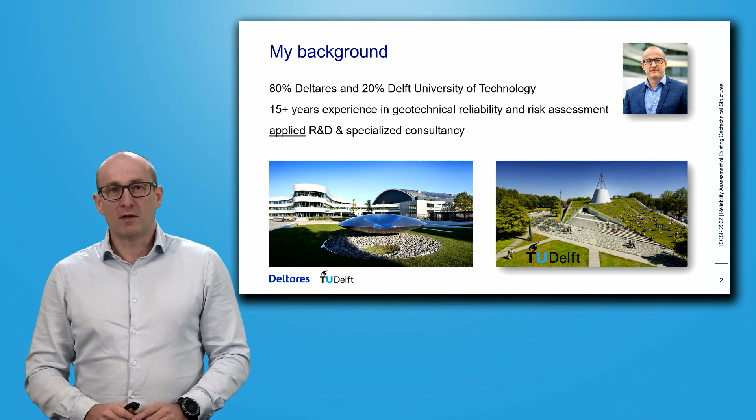I work at Deltares, a Dutch research institute in Delft, and part-time I am affiliated to Delft University of Technology. My field of work and expertise is geotechnical reliability and risk assessment, and I work mostly in applied research, development, and specialized consultancy. I've underlined the word applied because this is very much the angle of my talk. It's about application and how to bridge the gap between academia and practice.

I want to start with why I think our community has something to contribute to the assessment of existing geotechnical structures. I will give you some examples from practice and applied research and development, and I will go into development needs.

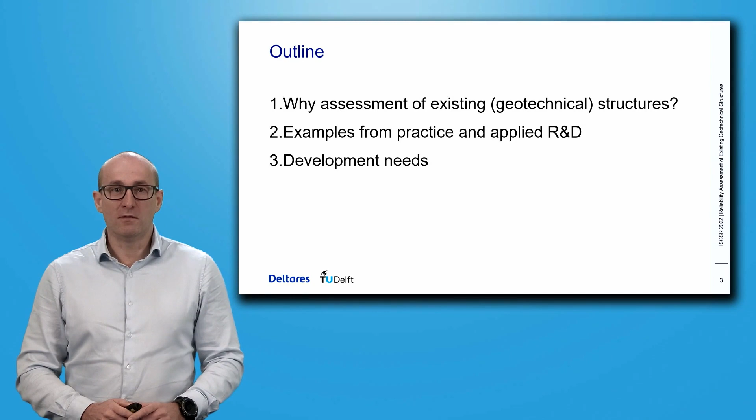Before looking into the assessment of existing structures, let's have a look at where design, reliability-based design, is applied to geotechnical structures in practice. I'm drawing here from my own experience. I'm sure some of you will have other experiences too.

In the Dutch context, reliability-based design is applied heavily in the field of flood defenses, like dikes and hydraulic structures, because our safety standards are formulated in terms of acceptable probabilities of flooding or failure.

You also see applications in offshore foundations, for example in the optimization of monopiles. But all these are rather special or extraordinary situations, and it makes sense, because if you go reliability-based and full probabilistic, it costs more effort compared to standard designs, of course.

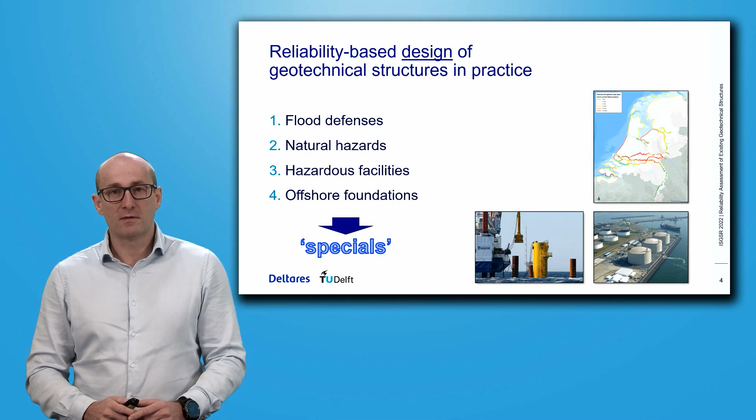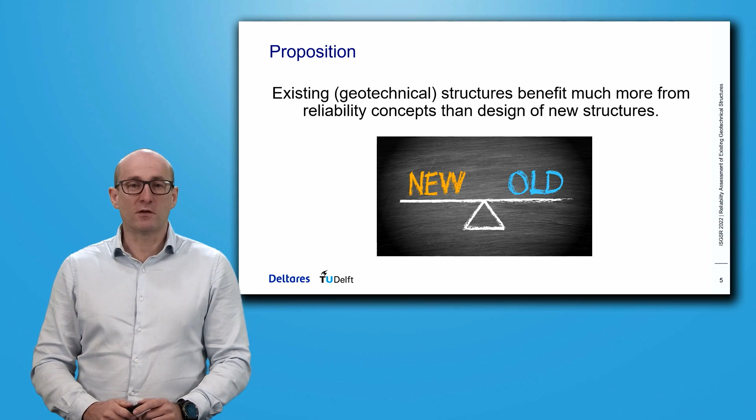But the proposition I want to bring forward today is that existing geotechnical structures benefit much more from reliability concepts than the design of new structures. And that's what I want to make the case for in this lecture.

Let's have a look at the Port of Rotterdam and their portfolio of hundreds of quay walls, existing structures. More than 50% of those quay walls are beyond or approaching their design lifetime of, most of the time, 50 years. So naturally, the asset management shifts focus from new construction to maintenance and lifetime extension of these structures.

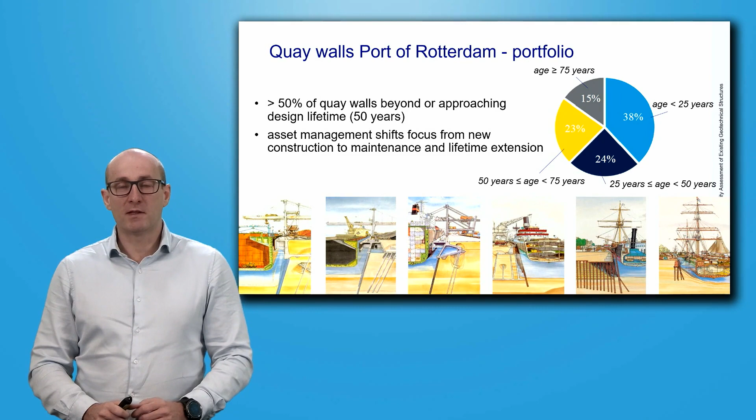Another example from Amsterdam: besides all sorts of other infrastructure assets that the city has, there is a large number of historic quay walls and historic bridges in the inner city center. You can see the numbers here - more than 200 kilometers of these old quay walls, more than 800 bridges, and these are masonry structures founded on wooden pile foundations, subject to bacterial degradation.

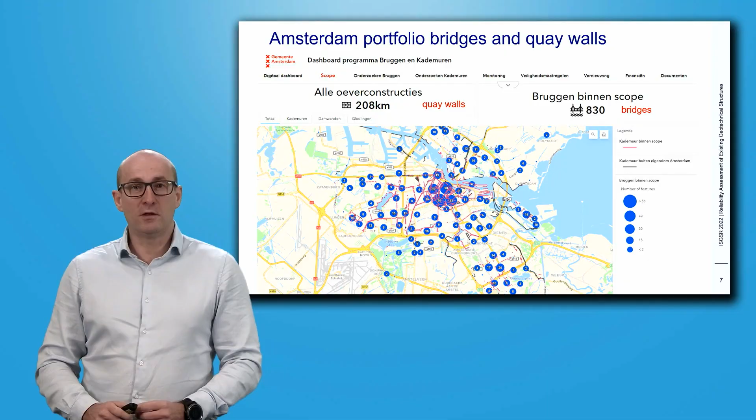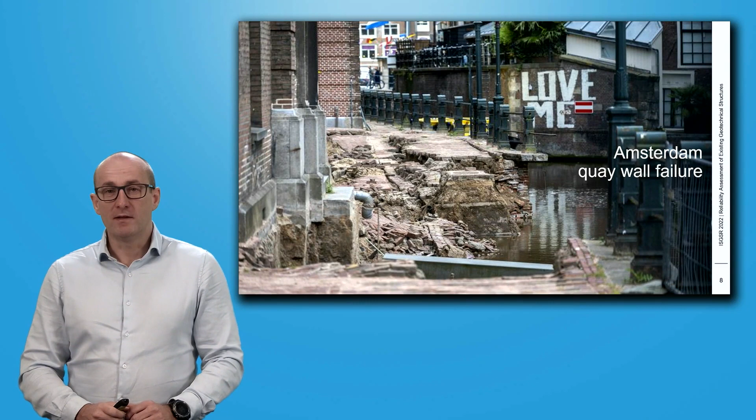And they need to be assessed for safety and safe continued use, because in Amsterdam we have seen failures like this one, a quay wall failure from last year. This was not a very big structure. Nevertheless, this example reminds us of the fact that the lifetime of these structures is not endless or unlimited.

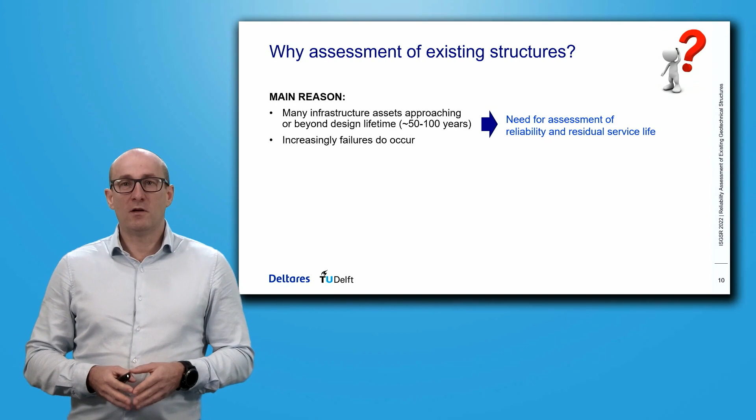So the main reason for looking at existing structures is that these structures get older and they approach their design lifetime, or they're already older than what they were originally designed for, and sometimes failures do occur. So there is clearly a need for assessment of the reliability of these structures and of their residual service life.

But there are other reasons to look at existing structures, and that is change of use of these structures. Going back to the Port of Rotterdam as an example, sometimes the owners of these quay wall structures have questions about whether larger ships can be moored at these quays.

Sometimes this is accompanied by questions of whether more nautical depth is possible here, which would mean dredging in front of the wall and increase of the retaining height. Other questions could be intensified use in terms of the surcharge loads on or next to the structure, or changes in safety requirements.

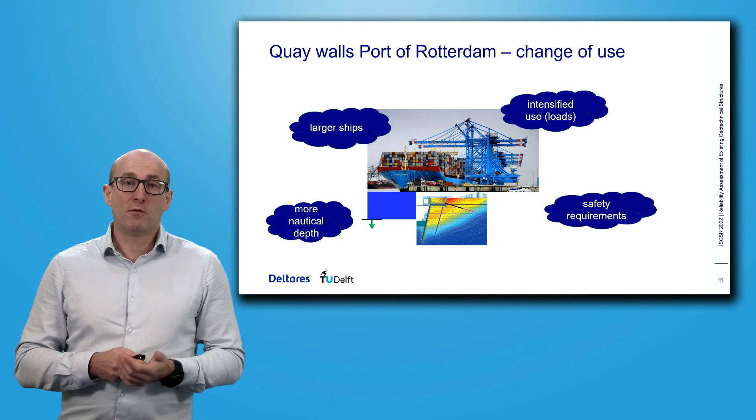Another example would be railway embankments. The Dutch infrastructure owner of the railway network, ProRail, frequently faces questions about the possibility of running higher train speeds, increasing service frequencies on some tracks and the underlying embankments, and also using heavier trains.

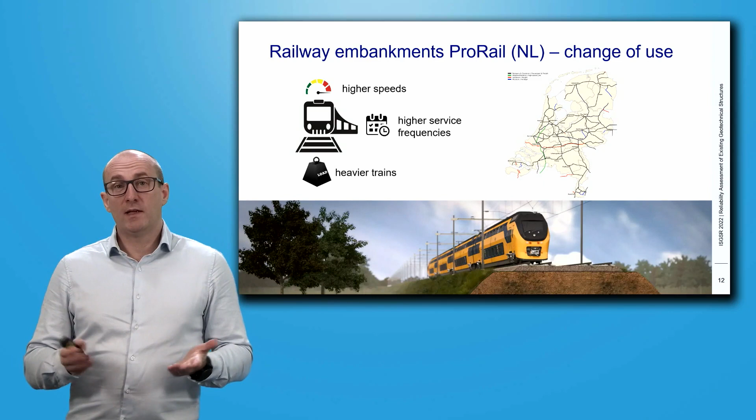So the question is, can that be done safely? This means that not just the age of these structures and going beyond the design lifetime is a reason, but another reason is if we want to use structures differently than what they were designed for, or if environmental conditions change, we may need to assess the reliability. We want to do inspection and maintenance for safe operation, and sometimes we need to go into retrofitting or reinforcement. Then there is a need for accurate information in order to have cost-effective asset management of those structures.

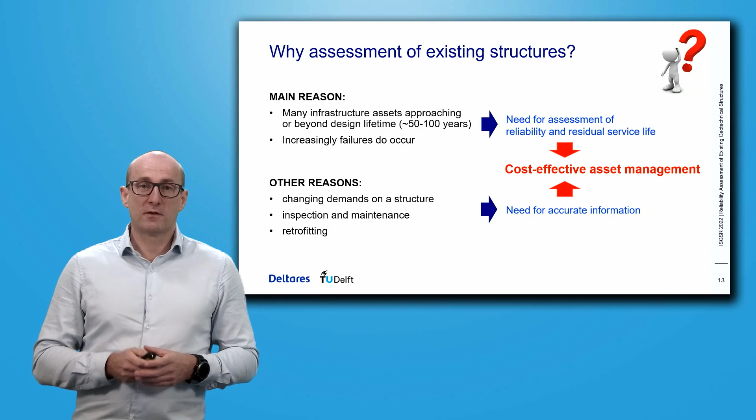So this was about why we look into existing structures at all, and also giving you some flavor of the numbers and the size of the problem.

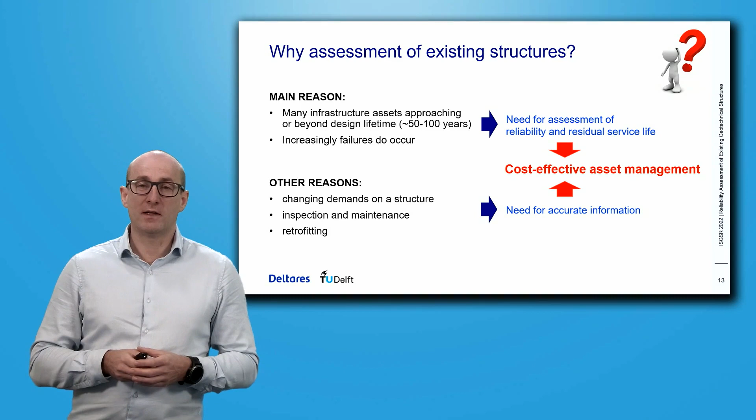But why reliability-based? Why is reliability-based assessment beneficial for these types of structures? Well, the first reason is that design codes are generally not suitable for assessing existing structures. There are several reasons, but one of them is that the target reliability values for new structures are based on different premises than the ones for existing structures.

If you build a new structure, the marginal cost for increasing safety, which leads to a decrease of risk, is typically much lower than the investment decision of safely keeping on operating a structure versus removing and replacing it, or starting a major reinforcement operation, which typically leads to lower reliability targets for existing structures if life safety can still be guaranteed.

But from an economic point of view, that should be lower, also accompanied by lower partial factors.

Another point is just experience, because if you start analyzing existing structures with the criteria that we have for new structures, you would largely consider them as unsafe, while you see that they're functioning well and that you have performance observations of the last decades maybe without any big problems. So there is a contradiction there oftentimes.

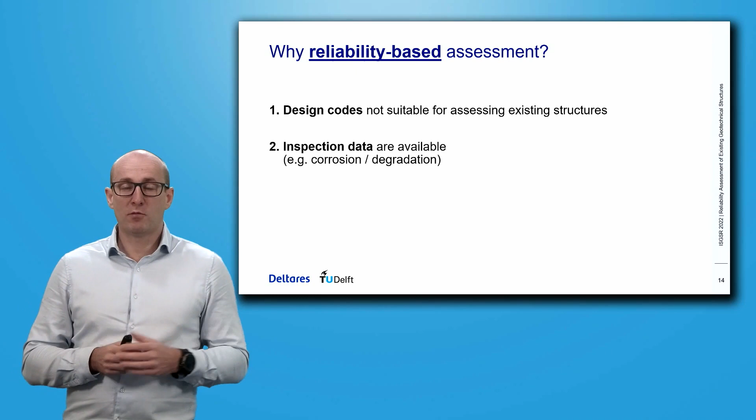Another reason is that we have more data on existing structures. We may have inspection data on, for example, degradation properties like corrosion, or other types of degradation like bacterial degradation of wooden structures. And we have data on the performance of those structures, which I call here performance observations.

This could be the fact that the structure was successfully built, so the survival of the construction stage may contain some information. We may have measured displacements of the structure during construction, but also in operation, and we may have other monitored responses to operational loading.

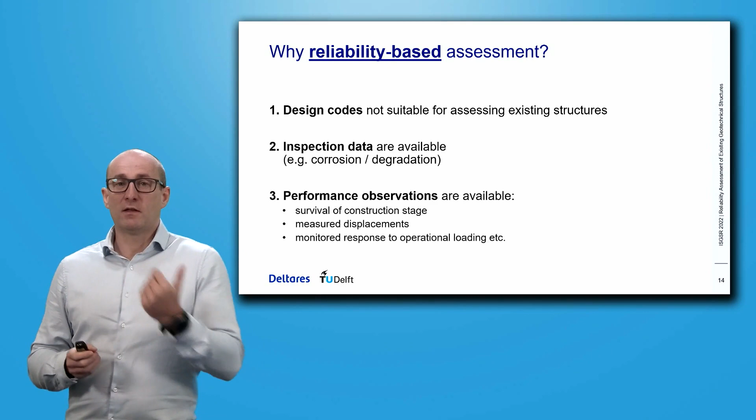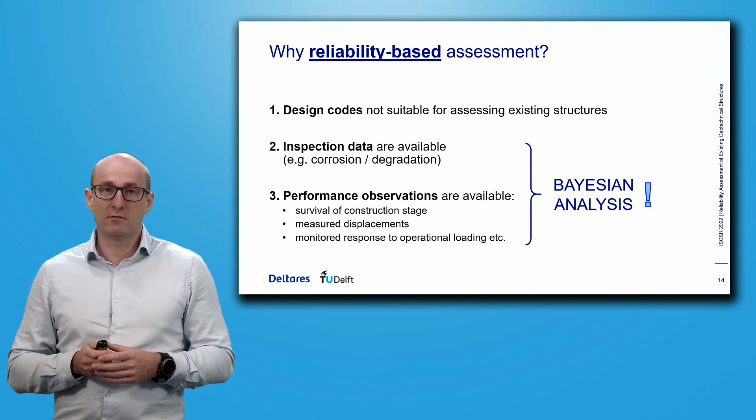And all this extra data that we have on existing structures compared to new structures screams for Bayesian analysis, to exploit those data, reduce uncertainties, and make a much more tailored assessment of the existing structures. And if we can do Bayesian analysis in a probabilistic fashion, we can do a reliability-based assessment and hence a more tailored one. So this was about the why of reliability assessment of existing structures.

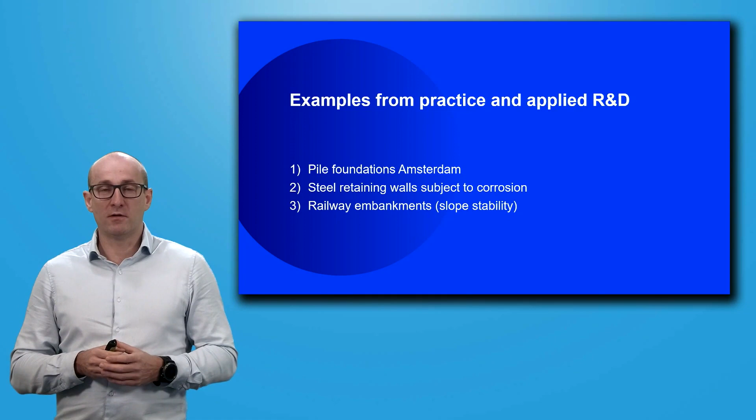Let me give you some examples from applied research and development that we've been doing recently. First, the bridges in Amsterdam, the historic bridges, masonry structures on wooden piles subject to bacterial degradation, often 100 to 200 years old. And the question there is, what is the residual service life, and how do we deal with the sparse inspection data?

The inspection data are scarce because they are difficult to obtain. The wooden piles are under the water. Oftentimes divers are needed to measure the pile sizes, to measure the degree of bacterial degradation of those piles, and that is costly and time consuming. And oftentimes you do not have the as-built data from the archives because the structures are simply so old.

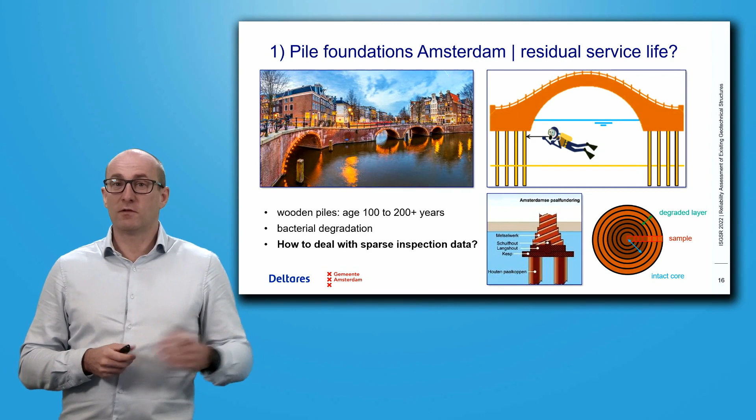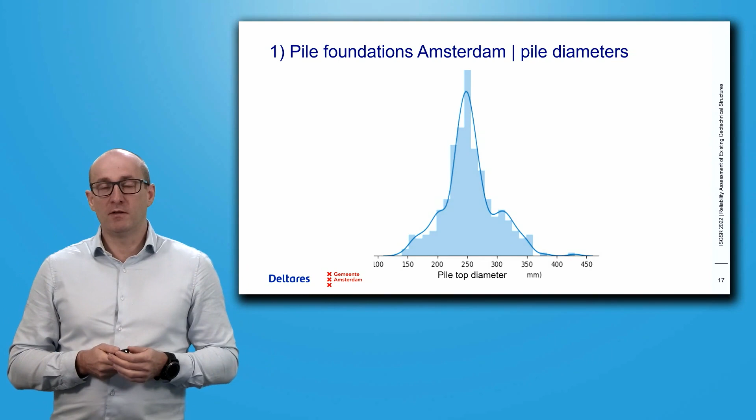The good news was that Amsterdam had already a large database from all those measurements that they did on the bridges. Here I give you an example of the pile top diameter. These piles are bigger at the top than at the bottom because they're like inverted trees. So the top diameter measurements of all the bridges that Amsterdam had are represented in this histogram, and you see that they range quite wide, between 150 to 350 millimeters. So if you go to a random new bridge where you don't have any archive or as-built information, you would have a large uncertainty in pile diameters.

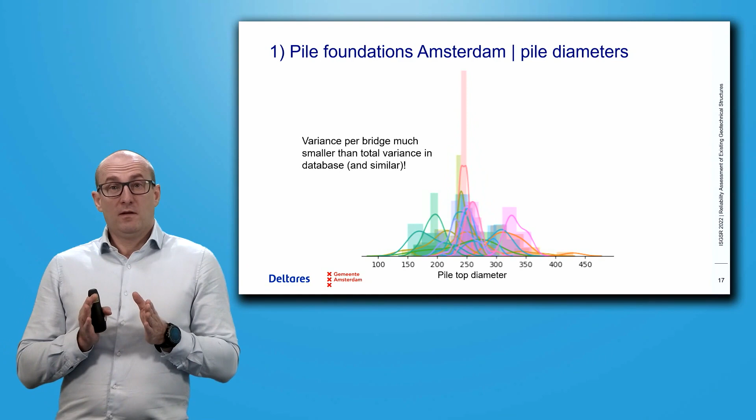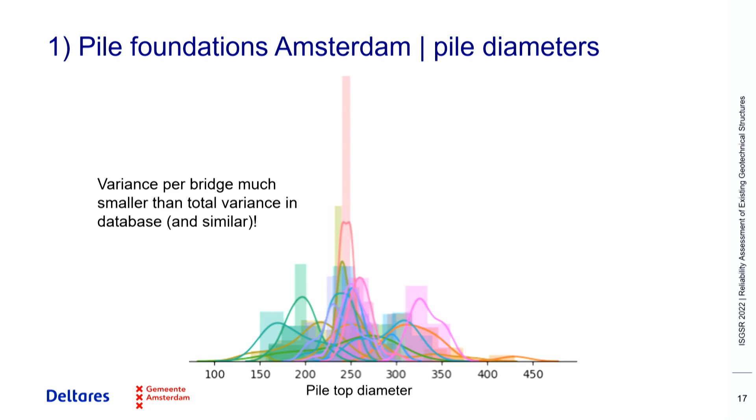But if you have a closer look into this data set, you see that the histograms for individual bridges, indicated here by different colors, are much narrower. So the variance within a bridge is much smaller than the overall variance of piles in Amsterdam. And it makes sense, because bigger bridges, sometimes with bigger loads, were built with bigger piles and vice versa.

So to exploit that information, we developed a Bayesian model for the Amsterdam situation on a couple of these measured parameters, like the pile top diameter and the thickness of the degraded layer. I'll treat that conceptually here, but we always have a mean value that is uncertain for an individual bridge, and we have a variability component within the bridge, a variation, for example, of pile diameters. Together these form the uncertainty in an individual pile.

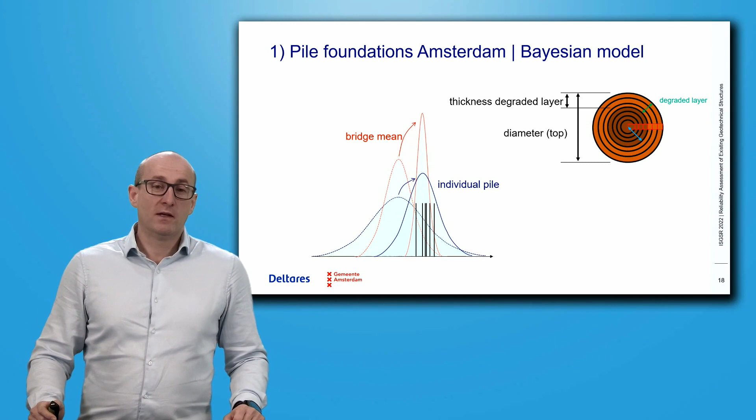So from the database, we could establish prior probabilities, and then if you have some data points on an individual bridge, just a few of these measurements allow you to use Bayesian updating and get an update on the bridge mean and also on the individual pile distribution.

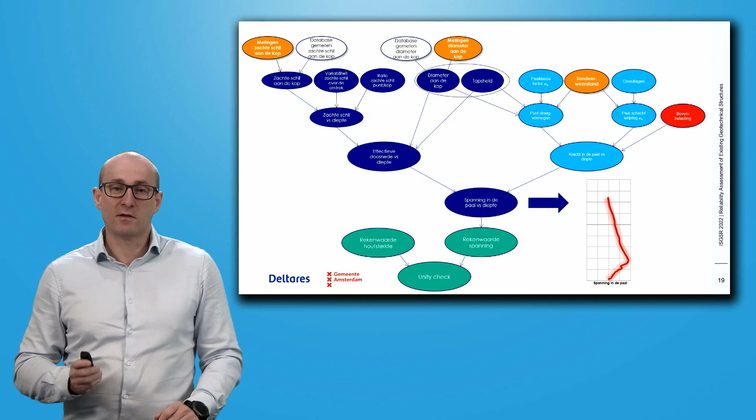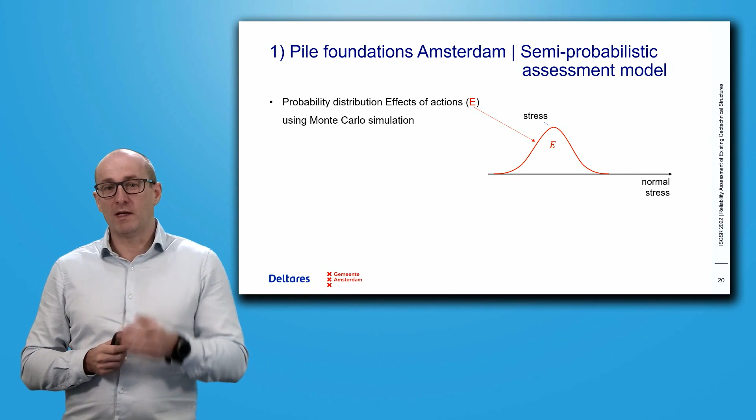And it allows us to simulate a model of the forces and stresses over depth in the pile, including uncertainties. The stresses in the pile, in Eurocode terms, are the effects of actions, which we determine by Monte Carlo simulation, and then we obtain a distribution like the red one here.

Now, from that distribution, we can extract or determine an assessment value, EA, where the subscript A is for assessment as opposed to the D you're used to for design, at a certain exceedance probability. That exceedance probability is based on two components: one is the target reliability index, beta T here, and the other is the influence coefficient of the effects of actions, or the stresses here.

So the alpha E would be the form influence coefficient if you did a fully probabilistic analysis. We based this on the recommended values in ISO 2394, but are now in the process of calibrating these values. Once you have that assessment value, you can compare it to the resistance or material strength, in this case the wood strength, to make your assessment and determine a unity check value, which is the inverse of the factor of safety that structural engineers use.

Why did we go semi-probabilistic and not fully probabilistic here? Because there was a lot of discussion on how to probabilistically model the wood strength. So we said, let's just take the value from the standard, the assessment value, and then do the part we can do probabilistically better - let's incorporate the uncertainties at hand on the effects of action side, fully probabilistic.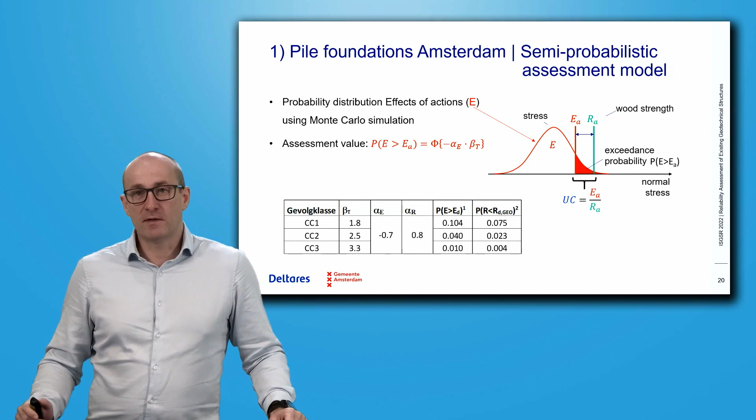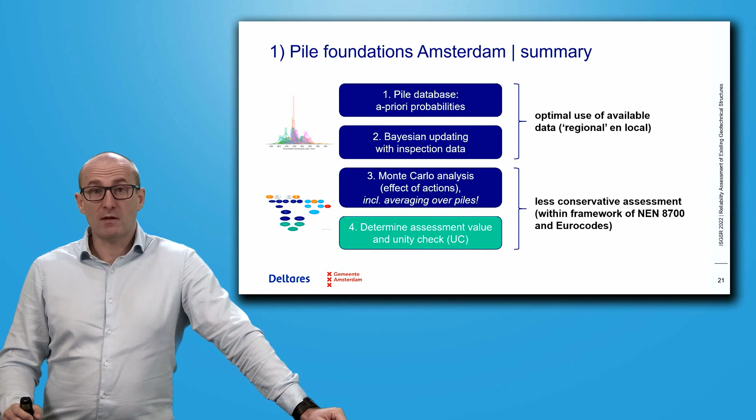So what we have ultimately with Amsterdam is that we establish a priori probabilities based on the database, add inspection data, do Bayesian updating, which leads to optimal use of available data, both regional and local, and with the Monte Carlo analysis - which I didn't mention, but which includes also averaging over piles, much easier in the probabilistic analysis.

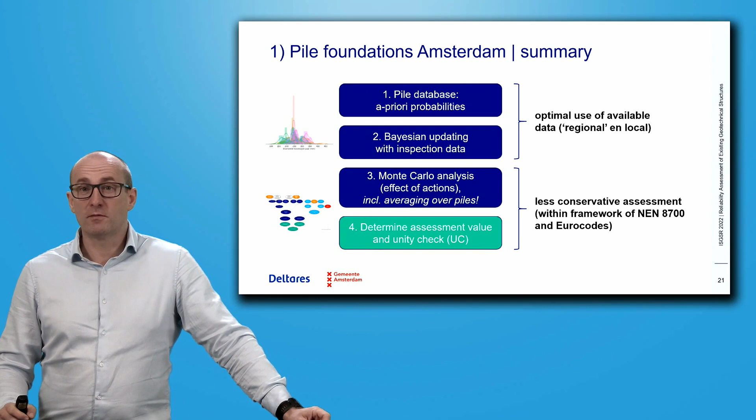We can determine an assessment value, which leads to a less conservative assessment, more tailored to the uncertainties at hand, and which still is within the framework of the Dutch Code for the Assessment of Existing Structures, which is an add-on to the Eurocodes for new structures.

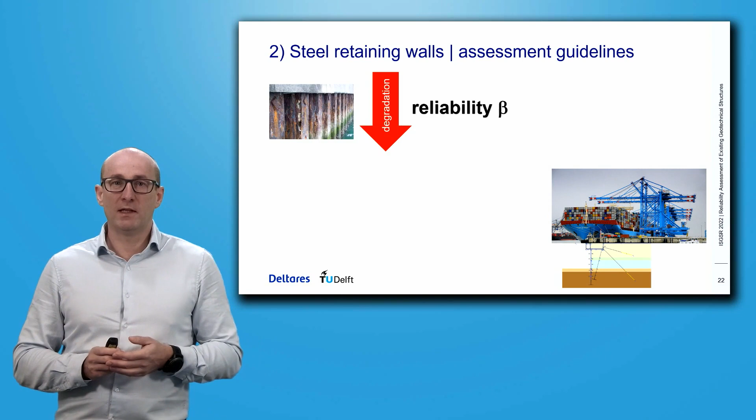Another example are steel retaining walls along waterfronts subject to corrosion. The key problem there is that reliability, of course, in time is negatively influenced by degradation, in this case corrosion. On the other hand, we have proven performance information - the survival of operational loads year after year reduces uncertainty and has a positive effect on reliability.

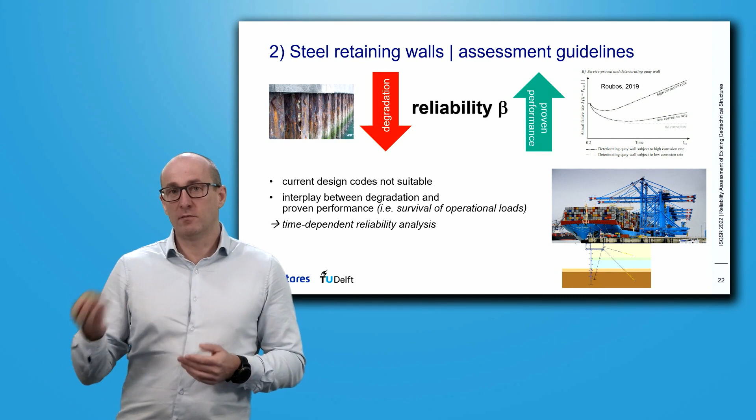Our conclusion when we looked at design codes was, again, that current codes were not suitable for assessment of existing structures, mainly because the interplay of degradation and proven performance was not taken into account. And if we wanted to address that, we felt the need to go for a time-dependent reliability analysis, to look at the development of reliability in time and also be able to derive partial factors.

So here's an example from a combi wall, tubular piles with sheet piles in between, where you see the development of the reliability index in time. Here you see that the reliability index would drop from construction at 4.5 to around 2 in about 90 to 100 years' time.

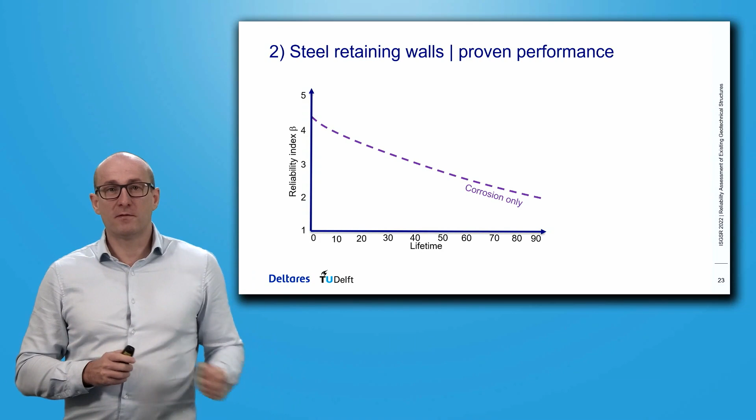Now, if you do account for the proven performance effect, the survival of the structure, you see a different picture. And if you compare that to the typical target reliability values in our code, you can extend the lifetime from roughly 50 years to 75. So you gain some lifetime of roughly 25 years.

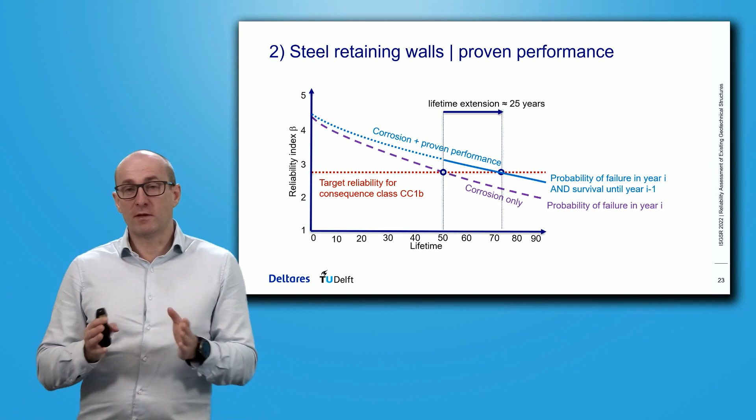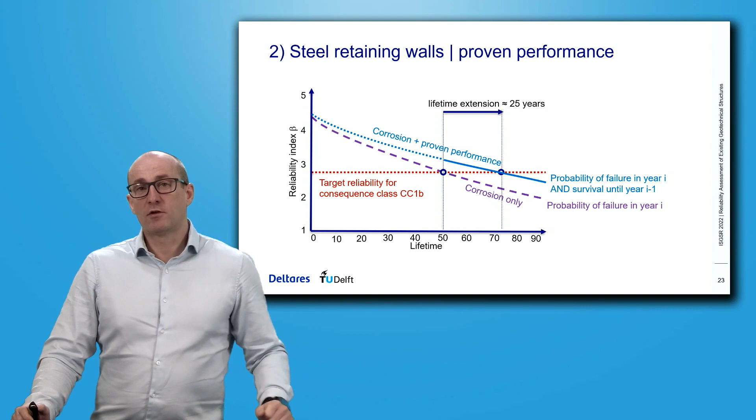So what is the main difference between the purple and the blue curve here? In the purple curve, we would just do a reliability analysis looking into the future, into a given year, with the uncertainty in corrosion, for example, at that point in time. While with the blue curve, we would include the information of the probability of failure in a given year and the survival up to that point in time—survival of all the previous years and all the operational load conditions up to that point. And you see that the reliability goes down much slower and you get that longer lifetime.

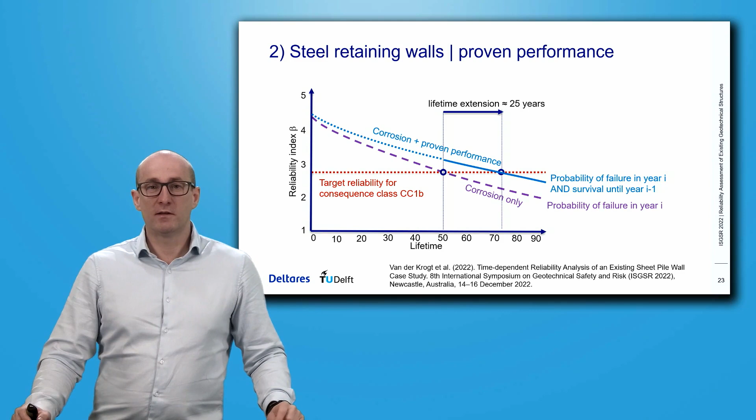I'm just highlighting the main principle here. My colleague Mark van der Krogt will provide more details in the session after this block.

Another example that I mentioned earlier are railway embankments. The Dutch asset owner of the railway network in the Netherlands, ProRail, has set up a large research program because they have challenges with assessing the reliability of the existing railway embankments under changing use conditions, under changing environmental conditions, but also sometimes just for the current operation.

Besides, of course, research more on the solid mechanical side of things and the train, track, embankment interaction, we also will look into some interesting reliability and probability elements to have a better tailored assessment for the slope stability of these embankments.

One element in that would be tailored reliability targets. If you look at the general purpose reliability target values from the Euro codes, they were made for buildings and bridges and also for new structures. Here we will look at existing structures and specific risk profiles of, for example, slope stability and subsequently derailing trains and all the consequences after that.

We will also look into heterogeneity and spatial averaging. Interestingly, here, the spatial averaging will not only depend on the soil variability, but also on the sort of geometrical configuration of the axles of the trains, the variability in axle loads for the trains, and so on, determining the failure volumes and hence the degree of averaging that you can expect.

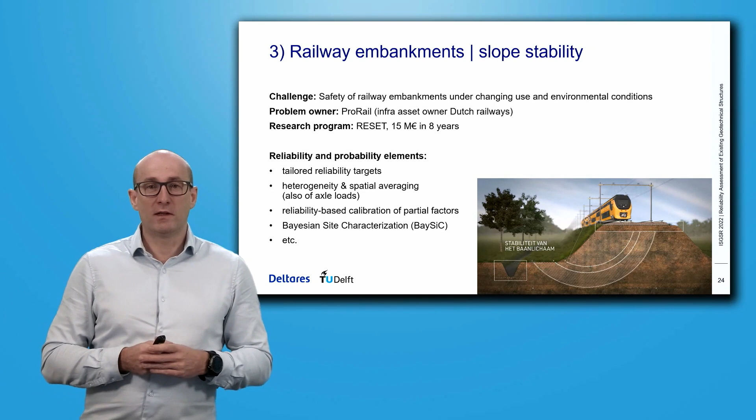This is mainly done by my colleague Antonis Mavritsakis, who already presented at this conference on a similar topic earlier.

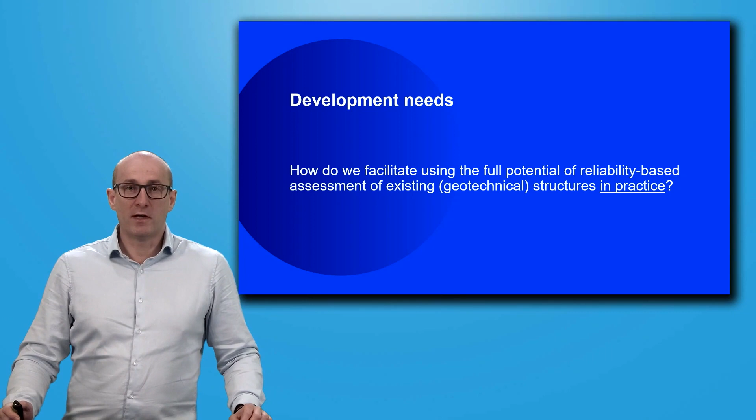So these were some examples that we were working on or are still working on. And in order to get these things closer to practitioners and to practice, I also want to highlight some development needs on things that I think are needed to fully exploit the potential. I've put these into 5 main categories, starting on the lower left.

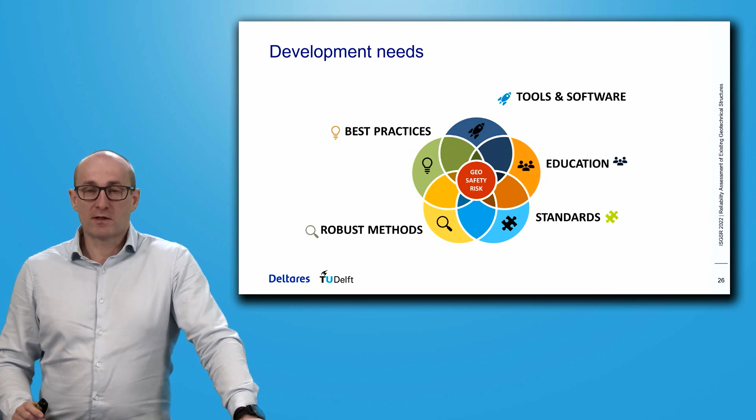We need robust methods, things that do not have too many convergence problems, for example, in terms of reliability analysis. We will need best practices, like good examples and elaborated case histories that practitioners can follow with confidence. There is work on the side of tools and software to lower the bar for practitioners to get started. There is certainly a role for education and also for standards and guidelines. And I want to highlight some of these.

So looking at education, I think there are 3 main pillars. University education, I think, is very important. It seems to me that this is also one of the main differences in terms of acceptance in different countries of reliability-based and probabilistic techniques.

We have a very good acceptance of these techniques in the Netherlands, and oftentimes I'm asked why I think that is. But if you look at the university education in the Netherlands and at TU Delft, for example, probabilistic design and structural reliability concepts have been part of the standard and compulsory curriculum for civil engineers for more than 30 years now.

People in the field now are trained in these techniques, and it's nothing special or extraordinary to them, but rather normal. Short courses like the ones at these conferences are very valuable in giving practitioners an idea of the potential of these techniques and some basic concepts.

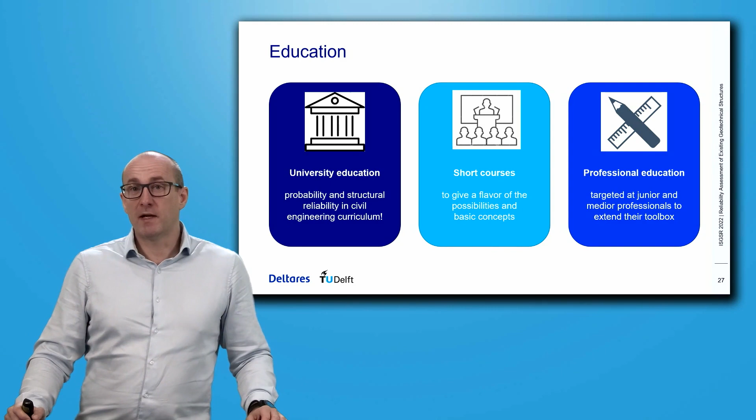Another pillar that could be expanded is professional education, targeted at junior and mid-career professionals to extend their toolbox. We have something like that at Deltares, an annual course on geotechnical risk and reliability analysis, where we provide basic fundamental concepts but also go quickly into practical exercises. We see that practitioners pick these up and use these tools in practice, because they come back to us with questions later on. So this is an element that could still be expanded to get traction.

In terms of tools, I think user-friendly software is important. There are a lot of very good and extensive open source libraries out there on topics like probabilistic analysis, reliability analysis, and Bayesian analysis. At the same time, these may be limited to people comfortable with programming and scripting.

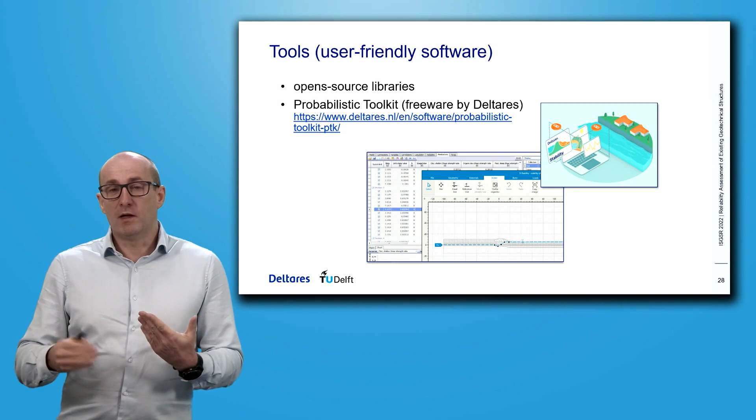But if you want to reach a wider audience of practitioners, things like the probabilistic toolkit we developed at Deltares - it's freeware, so I don't feel guilty mentioning it here - can be downloaded at the link mentioned, and will be very helpful because it has an intuitive user interface. It includes all sorts of reliability and probabilistic analysis techniques, and can be coupled or interfaced with a lot of geotechnical software, numerical analysis software, and your own models, for example in Python scripts. We see that this really helps practitioners get started earlier, without having to go into scripting first.

In terms of research, as I mentioned earlier, the big difference between existing structures and new structures is data availability. If we want to exploit that, we can still make progress in making Bayesian analysis more practically applicable for data-driven site characterization and parameter estimation, combining in situ testing data, lab testing data, but also performance monitoring data from structures and inspection data, in order to overall reduce uncertainties and really make the difference in a well-tailored assessment of a structure.

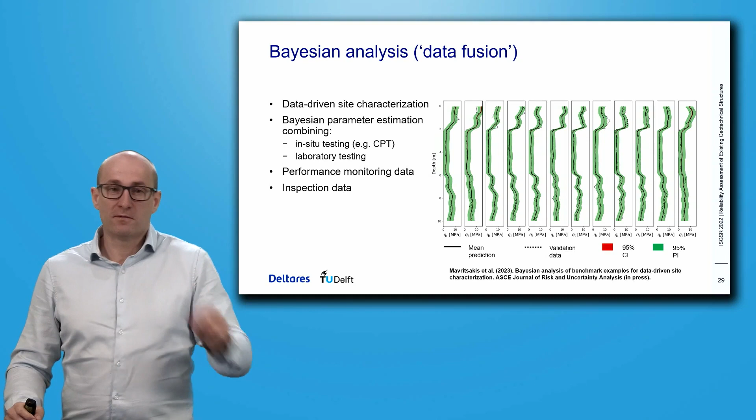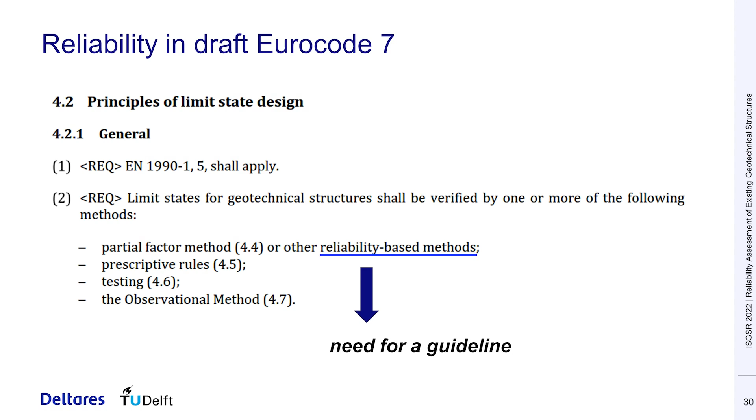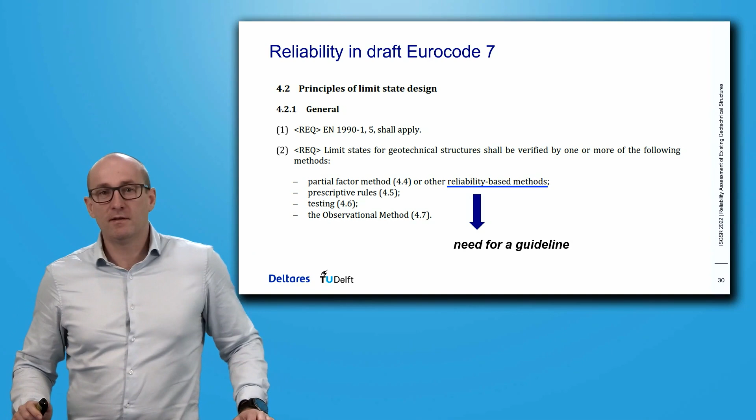In terms of standards and guidelines, I want to mention Eurocode 7. For the first time, it will include mentioning reliability-based methods as a verification method of limit states. But Eurocode 7 will not include details on how to do that, so there was a need for a guideline. I am honored to be the convener, the chairman of the task group developing this guideline, with the objective of providing guidance for full probabilistic reliability-based verification for geotechnical structures.

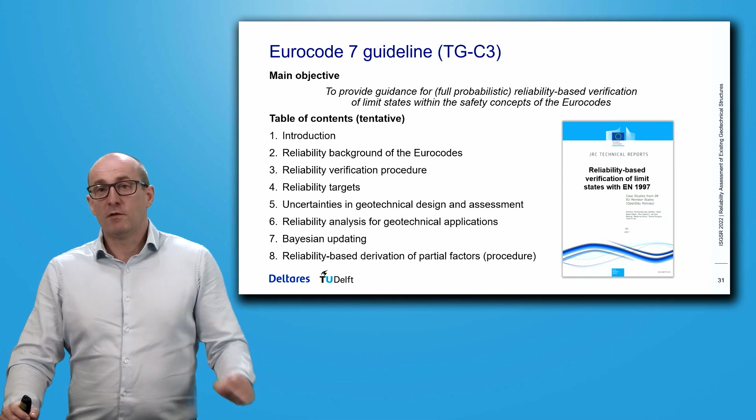I really believe these kinds of guidelines, anchoring these concepts in standards, will be needed for practitioners to actually use these techniques, because they need some legitimacy when approaching clients and authorities. If you don't have authoritative documents to refer to, it's very difficult to get your analyses accepted.

So in conclusion, there is definitely a huge and increasing demand for assessment of existing structures, including geotechnical structures. Our community has a lot to offer, because existing structures are particularly amenable for probabilistic reliability assessment due to data availability and the possibility to make things more tailored.

If we want to make the step to practice, there is still some assistance needed - I've gone through that list earlier. Bayesian analysis can really make the difference by reducing uncertainties, by incorporating all the data we have on existing structures to increase effectiveness. So I hope I have made that case for you, and thank you for your attention.